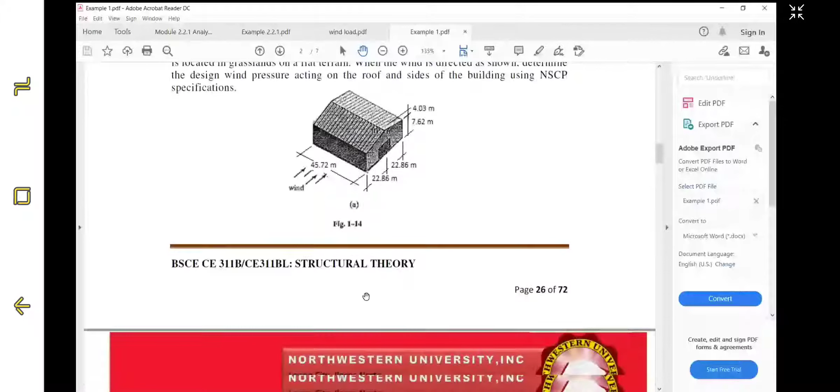Our V here is in meters per second in this equation, while in the other one, that is in KPH.

So they have the same result.

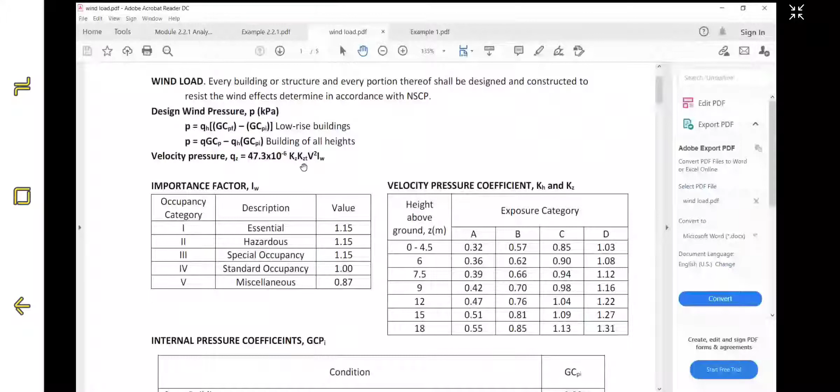So we have the importance factor IW. We have for essential 1.15, hazardous 1.15, special occupancy 1.15, standard occupancy 1.0, then miscellaneous 0.87.

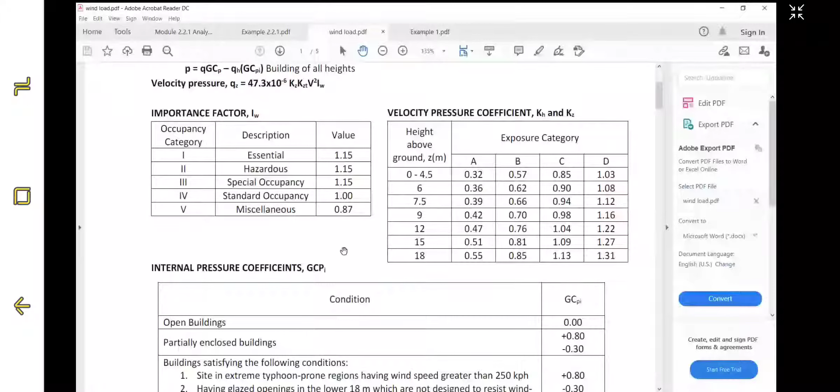So we have here open building, that is 0. So that is for GCPI.

Then buildings satisfying the following, or partially enclosed, we have 0.8 and 0.3. All buildings except those listed above, we have 0.18 and negative 0.18.

So we use here GCPI, that is positive 0.18 and negative 0.18. So it means that is all buildings except those listed above.

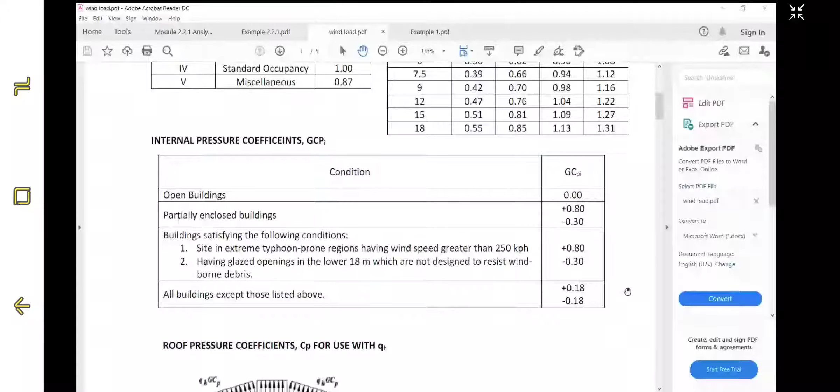So roof pressure coefficient for use with QH.

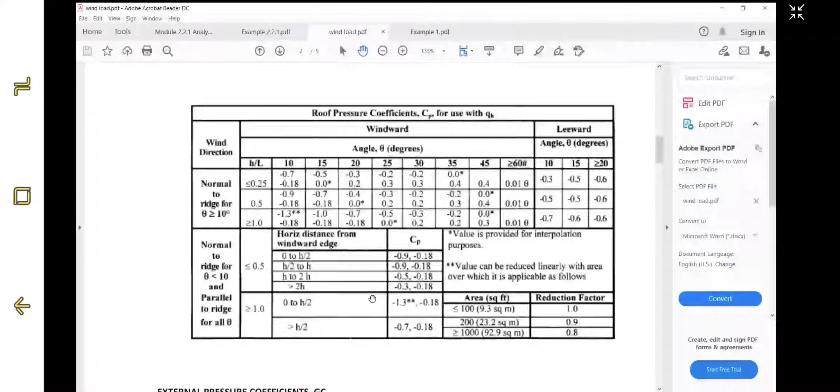Then for GCPF, in addition to this, we have GCPF. So GCPF will be this one.

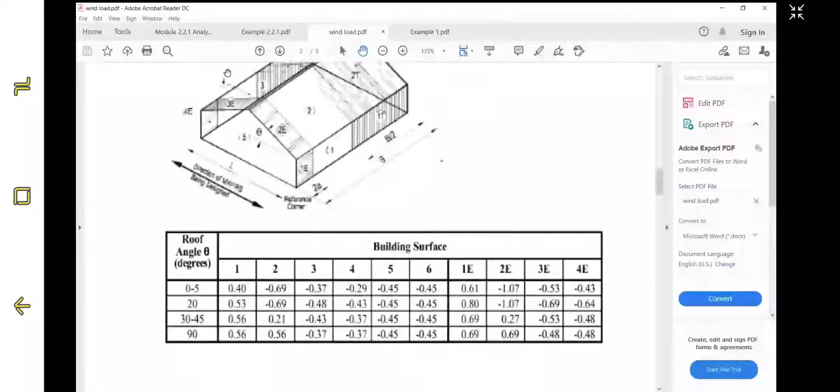So that will be based on the roof angle in degrees. We have 0 to 5 degrees, then 20 degrees.

If the angle is, for example, 18 degrees, we will interpolate between 5 and 20.

If the angle is say 25 degrees, we interpolate from 20 to 30.

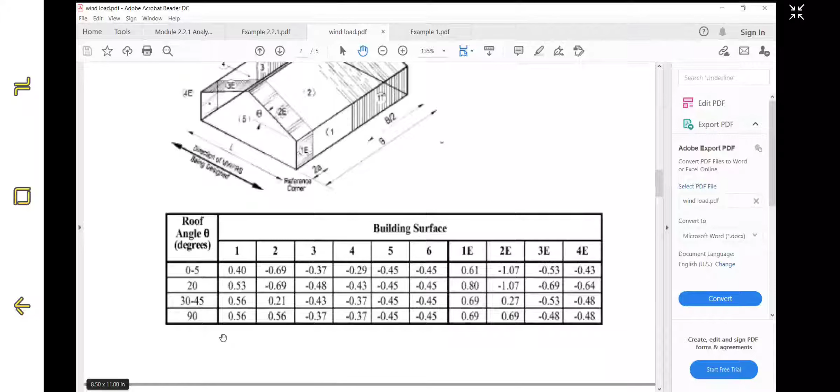Then if the angle is 60 degrees, then we interpolate 45 and 90.

So our KZT, if that is located on a flat area, then the value of KZT is equal to 1. We can determine the value of KZT if that is on an escarpment.

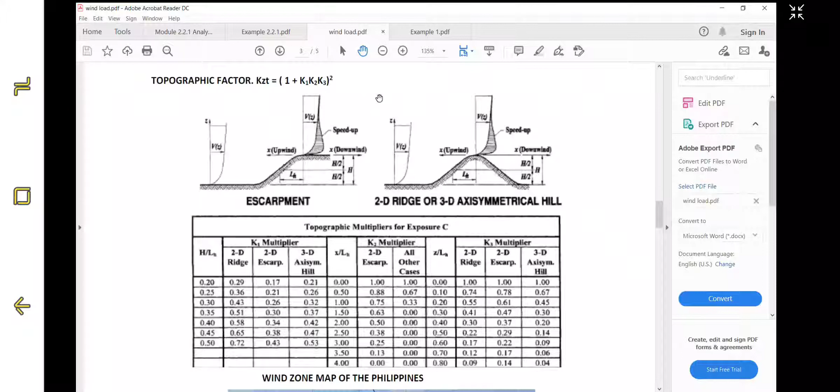But if that is on flat area, for example flat here, flat, that will be equal to 1.

This is the topographic multiplier for exposure C.

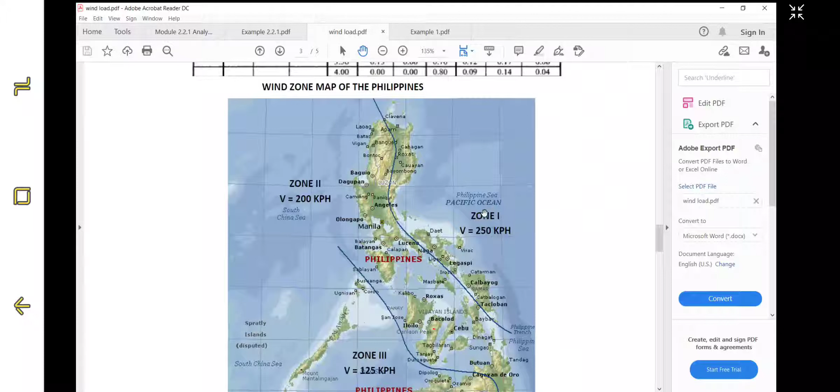Okay, so but for the NSCP 2010, ito lang muna yung mga ginagamit natin. We have 200, 125, at saka 250 kph. Okay, so let's have here an example, that is yung equation natin, this is based on 2010 NSCP. So determine the wind forces of the previous problem for the following given data.

Ang previous problem natin is the length or the span of the building is 9 meters and the height of the truss is 2.6. So location is Laoag City, exposure category D, occupancy is standard occupancy, ground to roof beam 6 meters, then lot profile, flat ground.

So Laoag City is under wind zone number 2, so therefore V is equal to 200 kph. This is based on NSCP 2010. So mean height, that is the same as Z. Z is equal to H, and that is equal to 6 plus 2.6 over 2. Okay, so the mean height is 7.3 meters.

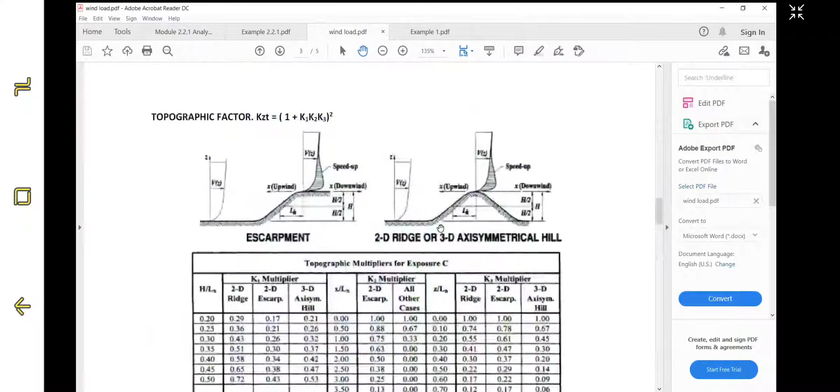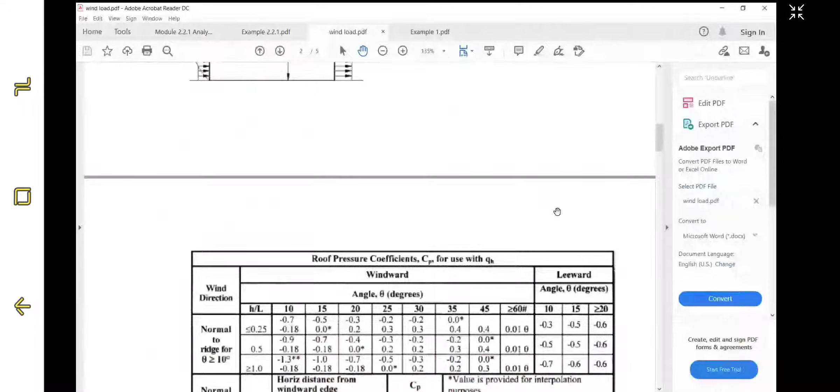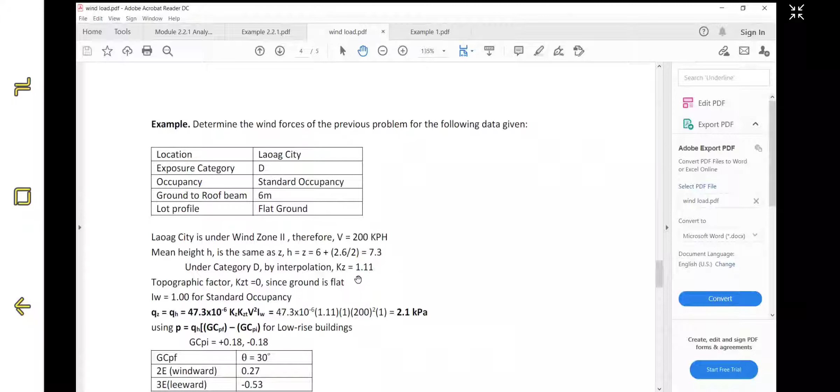Under category D, by interpolation, so dito tayo, 7. Okay, so ang mean height niya is 6 plus 1.3, 2.6 divided to 1.3, so 6 plus 1.3, the mean height is 7.3. So under category D, yung KZ is 1.11, nag-interpolate na tayo dito. Dito, category D, we have 7.3, for 6, 1.08; for 7.5, that is 1.12. So the value of mean height is 7.3, and the value of KZ or KH by interpolation, that is 1.11.

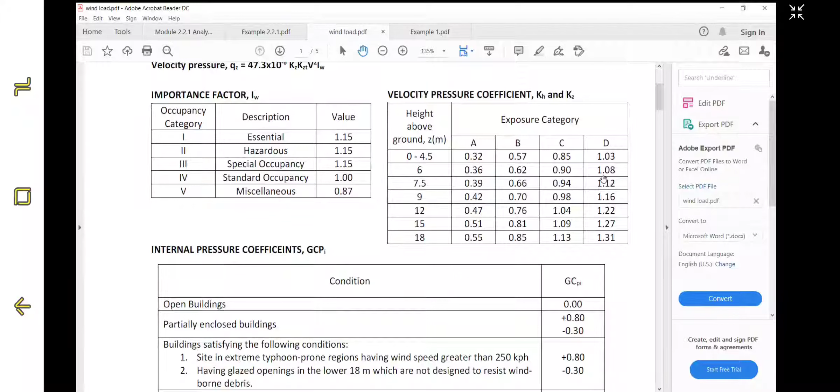So 1.11 yung nakuha natin dito. Then we have topographic factor KZT. By the way, this is not equal to 0, this should be 1, KZT is equal to 1. So the topographic factor KZT, that is equal to 1 since flat yung ground natin. Then IW is equal to 1 for standard occupancy.

So our QZ is equal to QH, and that is 47.3 times 10 raised to negative 6, KZ is 7.3... KZT is 1, KZ is equal to 1.11, KZT is equal to 1, so this should be equal to 1. Then V squared, so we have 200 squared multiplied by IW, IW is equal to 1, and that is equal to 2.1 kilopascal. So yan yung wind pressure.

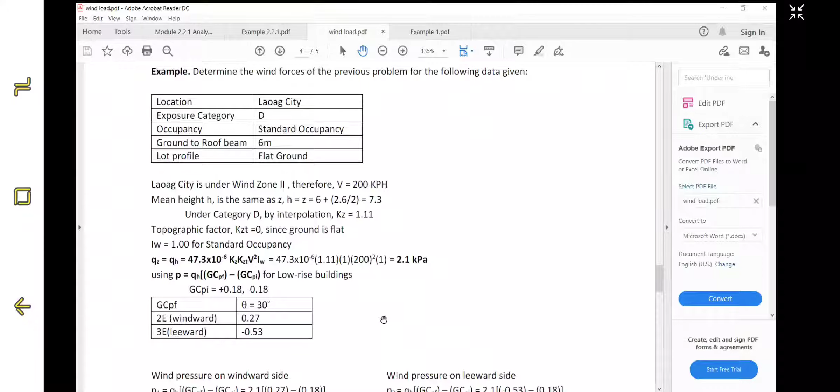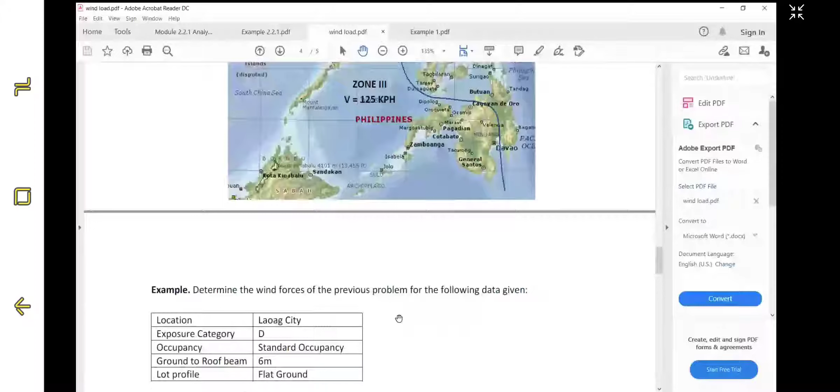So using P is equal to QH multiplied by GCPF minus GCPI for low-rise buildings. So GCPI is equal to plus 0.18 and minus 0.18. Then GCPF, that is equal to 30 degrees... so 30 degrees ba yung angle natin? What is the angle of the roof or the truss? So 2.6 divide 4.5, then inverse tan, okay, so that is 30 degrees.

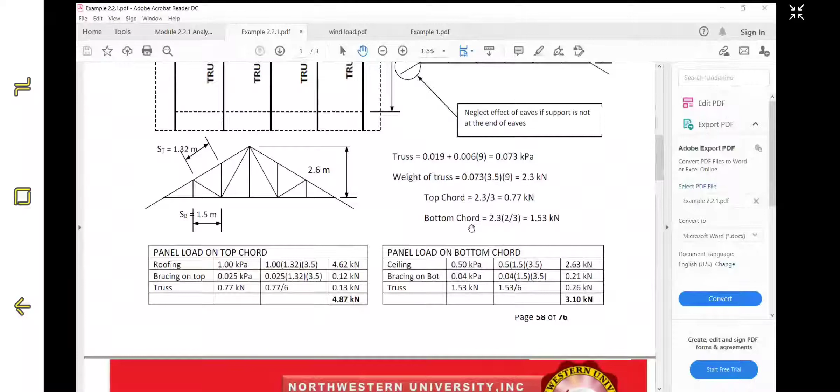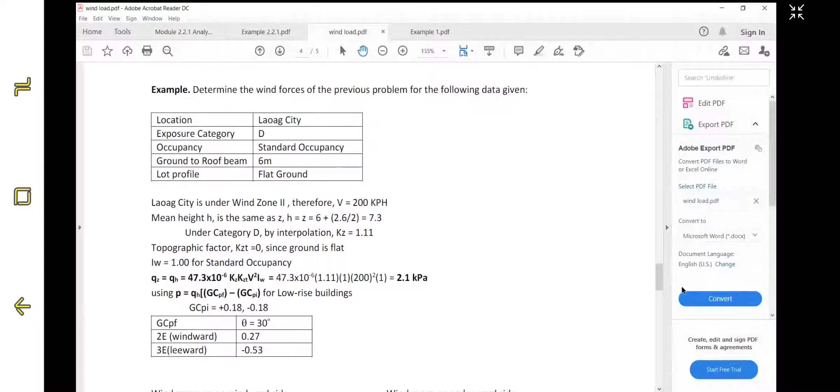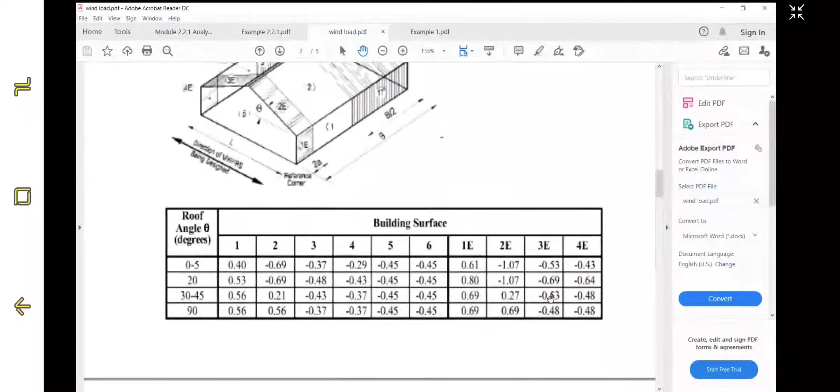So 30 degrees siya. For 30 degrees, so we have the windward and leeward. Ang windward natin, windward is 2E and leeward is 3E. So for 30 degrees, ito: ang windward natin is 0.27, ang leeward is negative 0.53. Okay, so we have 0.27 and negative 0.53.

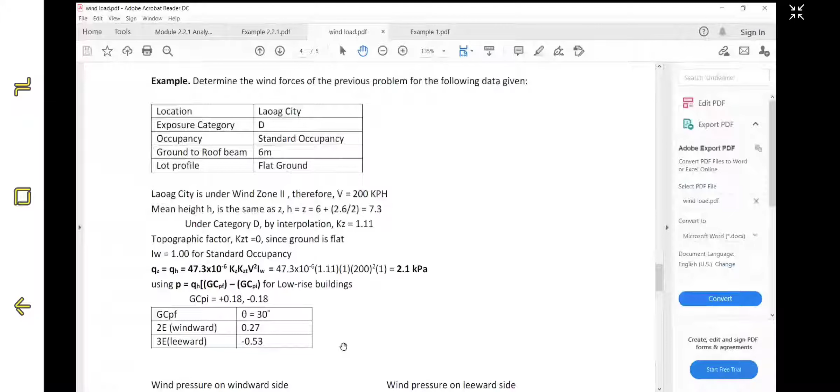Wind pressure on windward side. So using the values for GCPF, we have 2.1 multiplied by 0.27. Okay, our GCPF here is 0.27, then minus GCPI, GCPI is positive 0.18, so minus 0.18, then we have 0.19 kilopascal. So the other value is we have QH, 2.1 multiplied by GCPF, so we have 0.27 minus negative 0.18, so we have here 0.95 kilopascal.

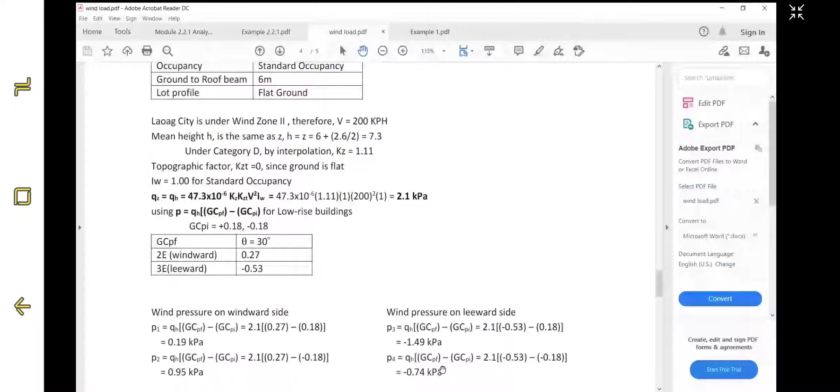So for wind pressure on leeward side, P3 is 2.1 multiplied by negative 0.53 minus positive 0.18, so we have negative 1.49 kilopascal. Then P4, we have QH 2.1 multiplied by negative 0.53 minus negative 0.18, then we have negative 0.74 kilopascal.

So we have the panel load on windward side. Ang panel load natin sa windward side, we have P times the area. Our pressure is 0.19, so we have there 0.19 multiplied by 1.32 times 3.5, so we have 0.88 kilonewton. Then the panel load on windward side, on the other value, we have 0.95, ito yung 0.95 multiplied by 1.32 times 3.5, so we have 4.4 kilonewton.

Then panel load on leeward side. So sa leeward side naman tayo, we have negative 1.49 times 1.32 by 3.5, negative 6.88. Then the other value is negative 0.74 times 1.32 times 3.5, that is negative 3.42 kilonewton.

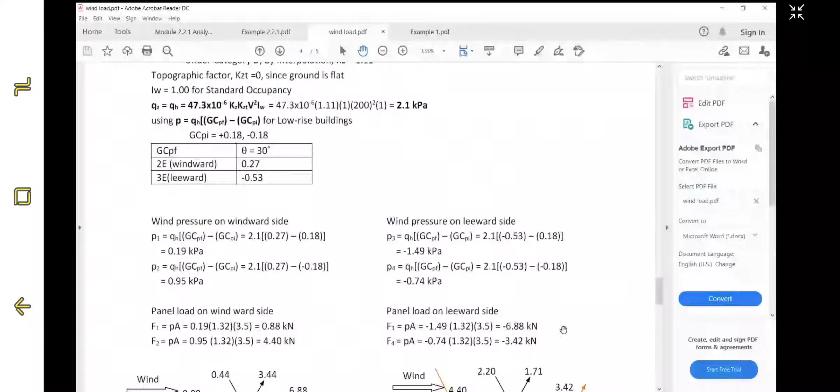So ito na ngayon yung value natin. Okay, so take note na yung wind load, unlike in dead load, we disregard the effect of the dead load on the support, pero dito hindi natin i-disregard. So we have to consider the wind load on the joint on the support. So dito that is 0.44, then 0.44, and this will be 0.88, kasi 0.88 yung nakuha natin, that is 0.88, 1/2 of 0.88 is 0.44, then 0.44 din dito.

So we have 6.88, 6.88, then half of 6.88 is 3.44, that is also 3.44. So take note on the direction of the wind forces. The wind forces on the windward side, that is pressure. So it is pressure there, and when it is pressure, that is downward.

The direction of the force is downward. Then on the other side, on the leeward side, 6.88 negative. When negative, that is suction. So when suction, it goes upward. So we have suction there, and the direction of the force is upward.

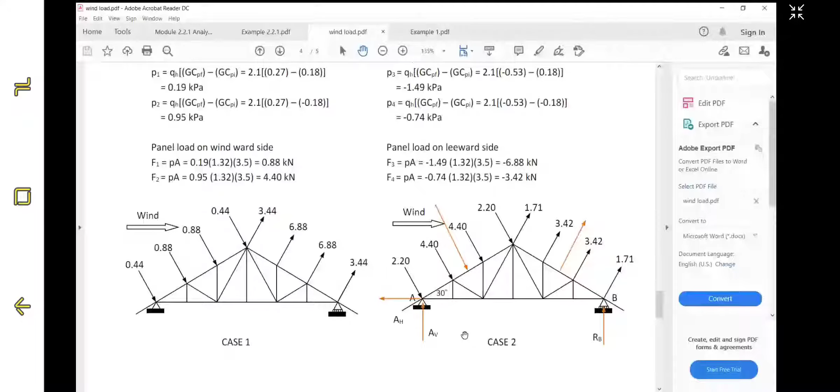So to have an example of the result of the wind load analysis, I used case 2 here. For case 2, our reaction at point A, we have A vertical and A horizontal, but the reaction at B is vertical only.

So we have summation of moments at A. We have 4.4 times 3, multiplied by cosine of 30 times 2.25, plus sine of 30 times 1.3. So this gives us RB. I took the resultant of the windward side, this is the resultant, and the resultant of the leeward side is this one.

So we simplified it so that we have 4.4 multiplied by 3 — this is 4.4 plus 4.4 plus 2.2 plus 2.2, so that is 4.4 times 3. Then cosine of 30 times 2.25, referring to the vertical component. Then plus sine of 30 times 1.3, referring to the horizontal component, whose distance is 1.3.

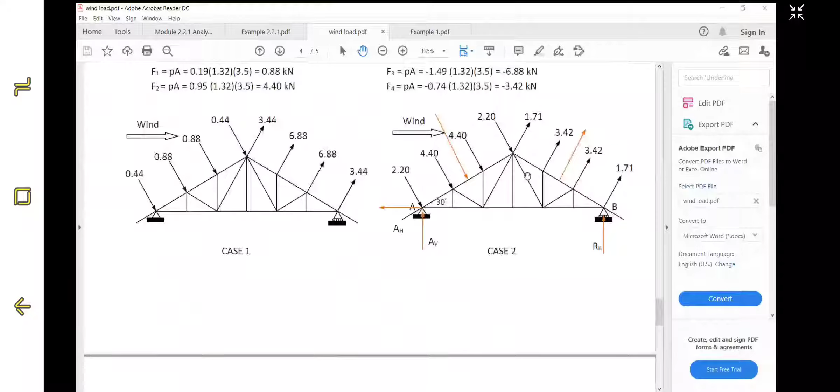Then on the other side, we have 3.42 times 3, multiplied by sine of 30 times 1.3, referring to the horizontal component. Then minus cosine of 30 times 6.75, which is the vertical component, with a distance of 6.75.

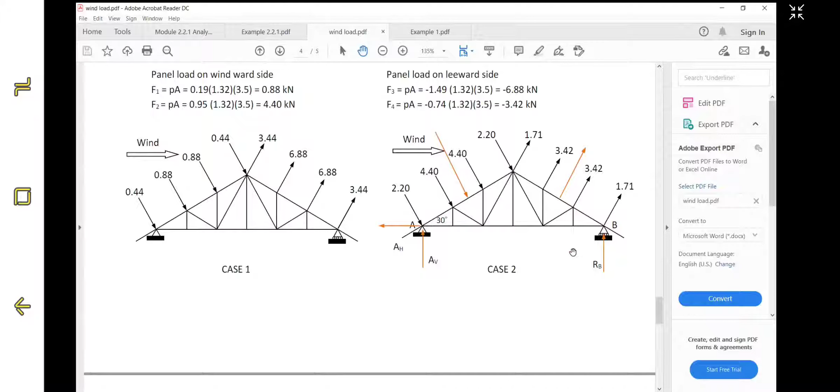So we have RB equal to 2.11 kilonewton downward. So instead of RB being upward, it is downward.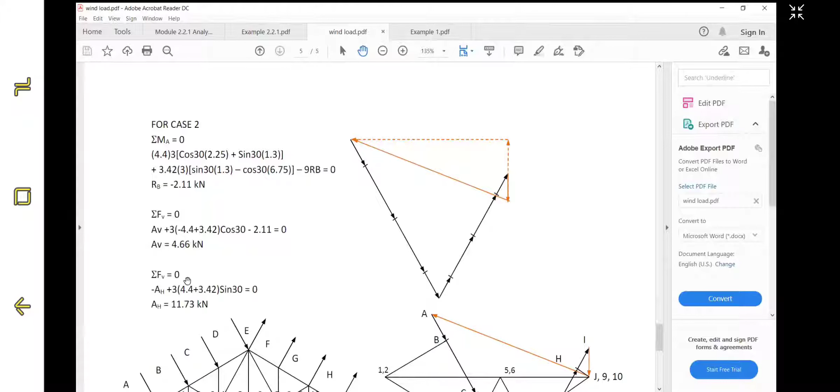Then summation of forces vertical equals 0, so we have A vertical is 4.66. Summation of forces horizontal equals 0, then AH is 11.73 kilonewton. So this is the direction of the reaction — the reaction at A is directed up to the left, and the reaction at B is directed downward.

Using the graphical method or the Maxwell diagram, we have AB, here is AB, then BC, that is BC, CD, and DE. Then EF is upward, here is EF, then FG, then GH, then HI. Then the reaction at B is downward, here it is, then we have the reaction at A, and it closes.

So at B, C, and D, we have to draw an inclined line — at B inclined, at C inclined, at D inclined. Then at F, G, and H that is also inclined — F inclined, G, and H inclined. Then we will look now at points 1, 2, 3, 4, 5, 6, 7, 8, 9, and 10.

The location here will be point 1 here, then we have point 1 and point 2 — between 1 and 2 there is no load, so the point for 1 and 2 is the same. That is also the same with 5 and 6, there is no load, so 5 and 6 are there too. Then 9 and 10 are also the same, there is no load. So just follow the diagram and you will be able to get the points on the Maxwell diagram.

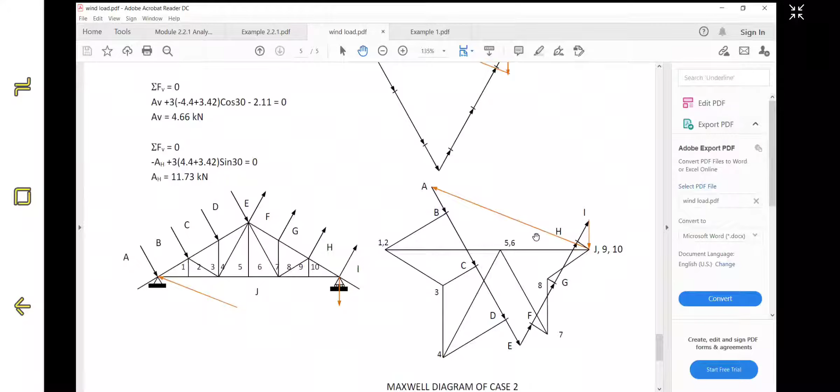And now we have the result. Okay, any question?